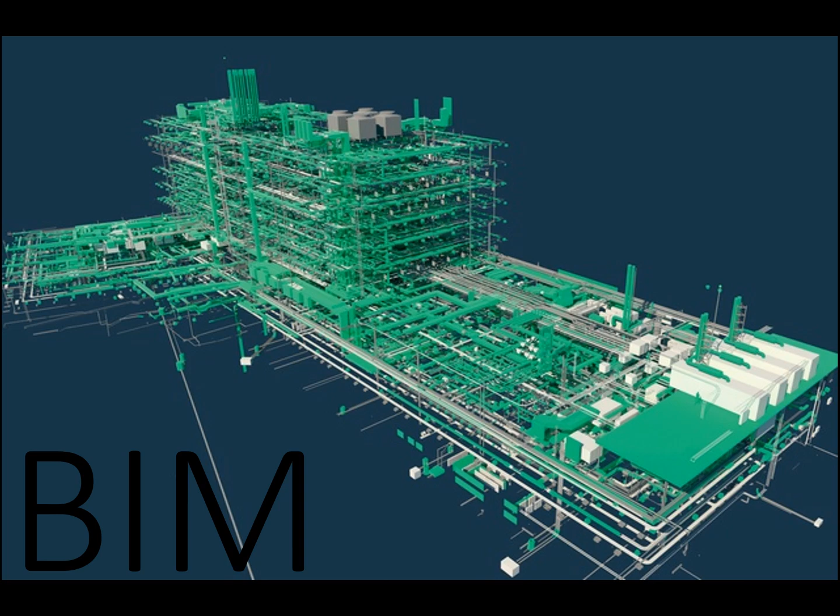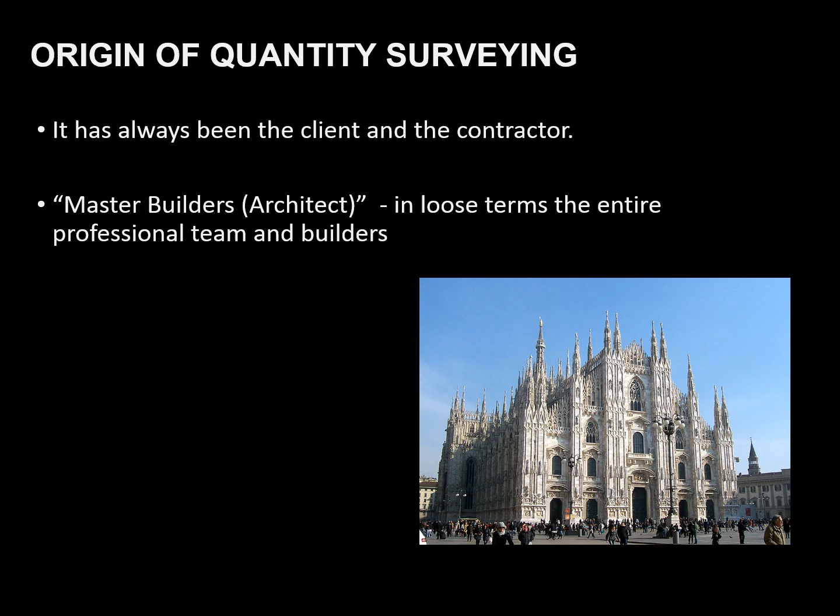The main thing is some background we need to look at, which you'll remember from first year, where we started with the origins of the quantity surveyor and how it spread out of the master builder functions, with quantity surveying as a specialization of the architecture profession as it developed later on, where clients started to request quotes beforehand from contractors. Contractors started colluding, and clients caught on to that, and then started appointing independent QSs to manage that, to check whether the quotes supplied are actually in line with what is being presented.

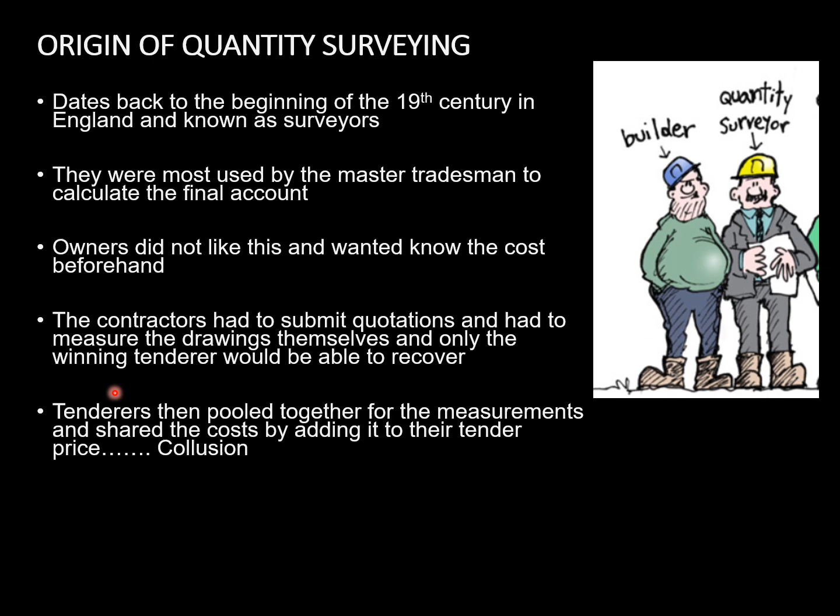That's the finalization of that background, but the main thing is we've always been working on BIM and building information modeling per se, and it's the maturity levels that differ, from where we used to work on paper-based architecture drawings, to getting digital drawings and 3D models to measure from, etc.

Architecture is mainly at the forefront of any design process, because they are the visionaries of whatever building is going to be constructed. Similarly, engineers are the visionaries of any civil construction that takes place.

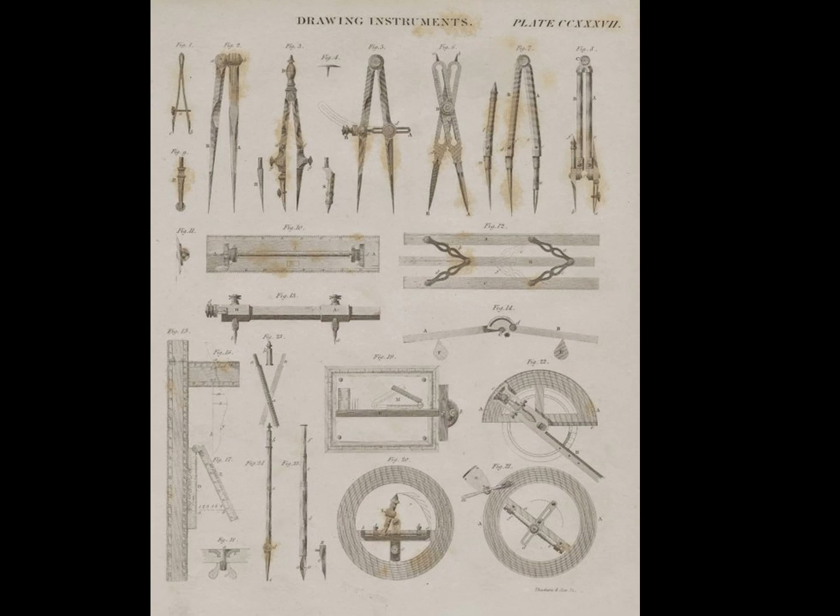They had quite a few tools that developed over the years, and this is typical of the details that would have been produced. But the problem was that making any changes had a big impact on the process, and any amendments caused a lot of problems down the value chain.

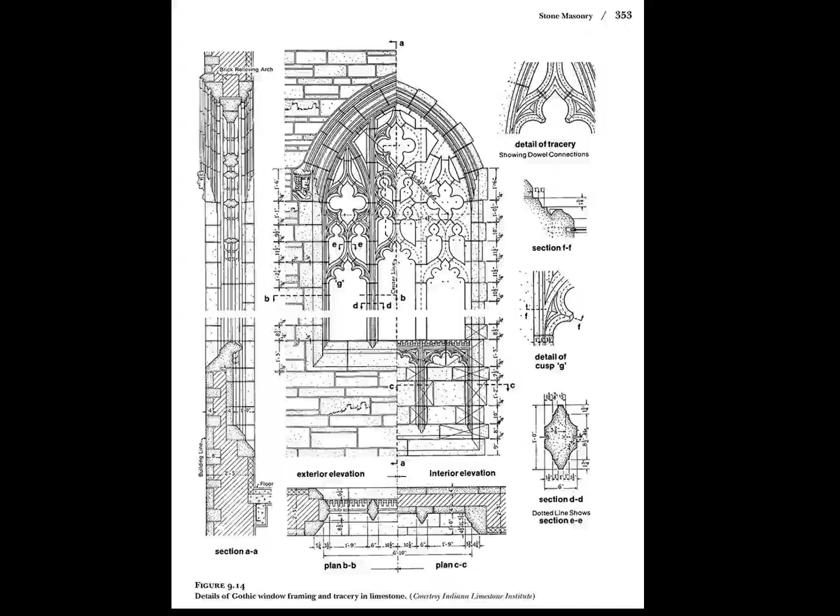The way models were presented was time-consuming hand construction, cardboard cutouts, etc. I mentioned to the residential class that architects still do the same design of model production through construction of physical models, for that hand-eye coordination, looking at the design and building it from scratch just to learn the process.

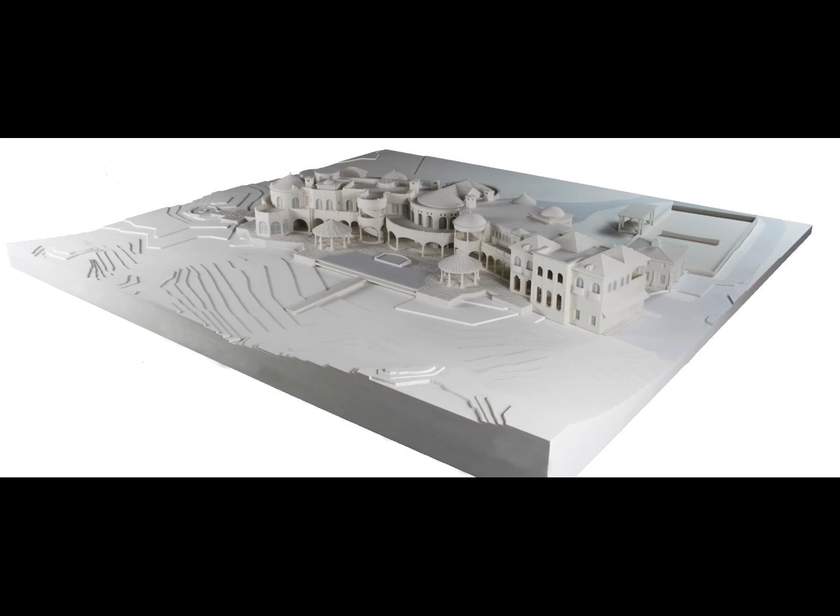Similarly, we do the same when we teach you how measurements work, because most of the programs we use are based on these principles, and we found that understanding these principles is much more important than actually knowing the software, because if you know the underlying principles, the software can easily be learned. But as programs get more user friendly, this process can shift slightly.

The short and the long of building information modeling is that information is produced by one stakeholder, then transferred to another stakeholder, and each time it's transferred, there's some information loss that takes place. So the main thing BIM wants to eliminate is the loss of information, to lessen that process as much as possible, and it also depends on the involvement of each stakeholder in between.

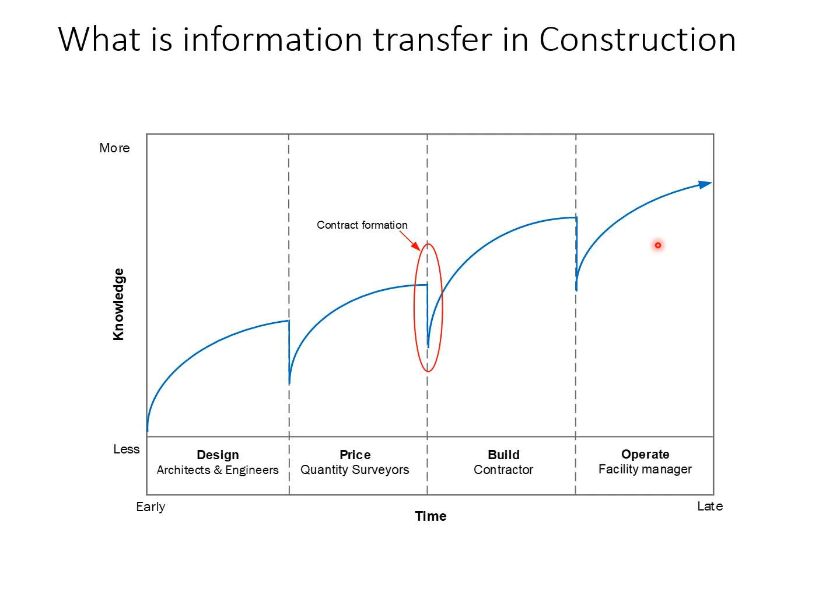Usually we find that most of the information lost is during and after construction, when handing it over to the client or the facilities manager, where a lot of information is lost.

Now, manufacturing is a different process because it's the same product produced over and over again. It's not like construction, where we have a new product produced each time, which places a little more emphasis on the transfer of information. Also, in construction, it's every time a new team put together to transfer information and do the necessary designs.

So for this section of the study material, the main thing I want you to understand is that we've got different maturity levels, where a BIM maturity level of 0 is still mainly CAD based or hand drawing type of technologies. We still use quite a lot of CAD drawings usually supplied by architects to QSs or construction managers, etc.

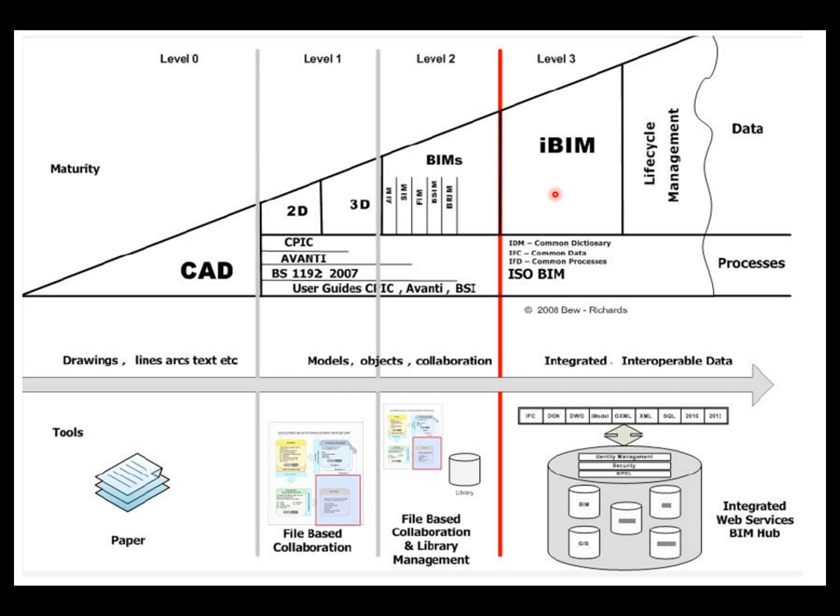Then this is just another visualization which also assists. We have BIM level 0, mostly paper-based drawings, CAD drawings, then going over to a 3D visualization, and then finally going up into an iBIM type of BIM environment where everyone does their part on the model. And then secondly is the integrated feedback between the physical and the digital.

Okay, then the other thing that I want you to be able to understand is, yes, we've looked at the BIM maturity levels, but it differs from the BIM project lifecycle, where you would have a typical program or design on a BIM model and have the conceptual drawings done, then the detailed design is still done on a 3D model visualization platform. The analysis, everything takes place on that platform. The documentation is pulled from this model, and then manufacturing takes place after that, and then 4D BIM and 5D BIM, on which I'll expand a little later on, is based on where the actual construction takes place.

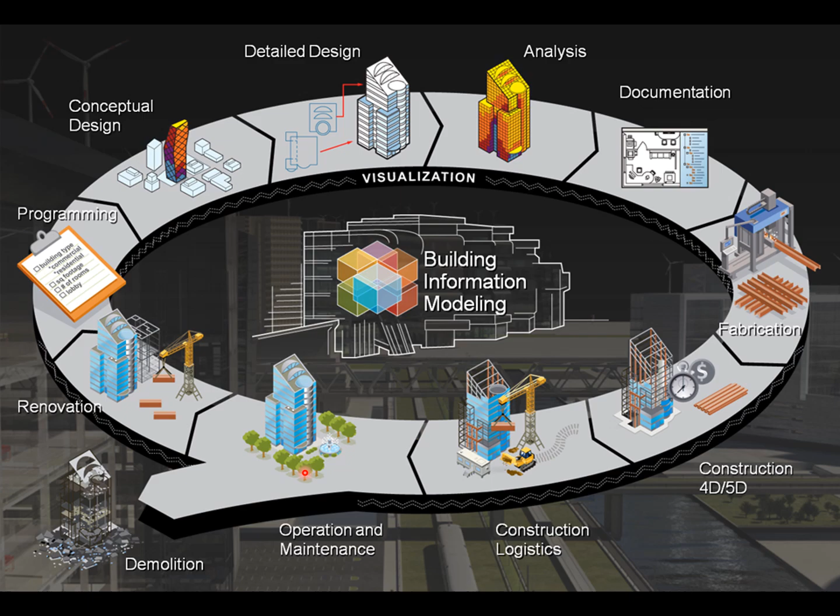The construction logistics is then also planned using the BIM model, and then the operational management and maintenance is conducted on the BIM model together with the physical structure that has been built. Something which is left out here is 6D BIM. Okay, and then any renovations will take place, or the design can be used for that, or for the demolition of the asset.

So the other thing that you need to be able to convey to me is that you understand that 3D BIM is mostly concerned with the architects or the engineers, the actual design of the model. 4D BIM is where you've got the construction managers or construction project managers that do the programming based on the model. And then 5D BIM is quantification from the BIM model. And then 6D BIM is the life cycle planning, which is the facilities managers, etc.

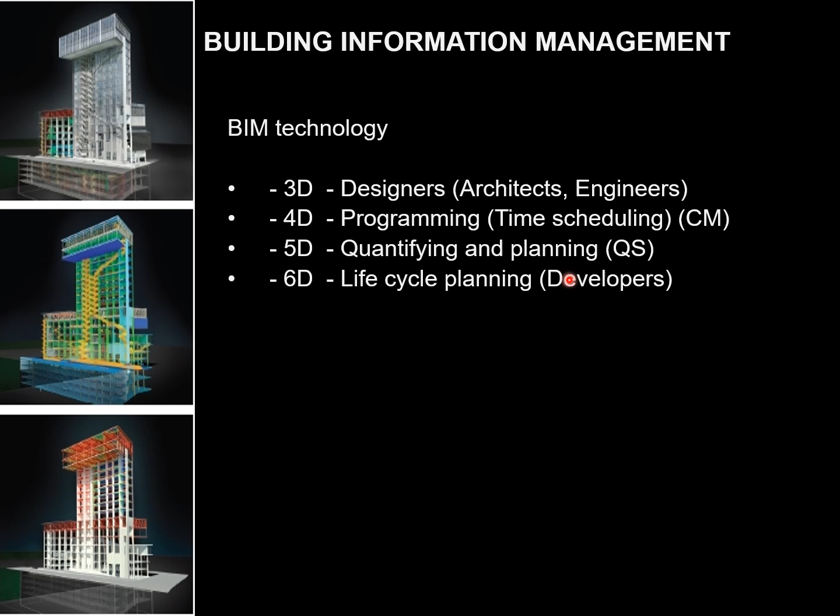Then I've just added a couple of videos. We watched the first one in class, and it relates to technology and how it has progressed, items that we haven't really realized but have revolutionized the way we conduct our business. For instance, PDFs revolutionized our way of thinking on how we transfer information to and from site on drawings, etc. Even just stitching a tender document of 600 pages together into one PDF was a major step forward for the construction industry.

Okay, and then I just included two other videos here, the one relating to 4D BIM and 5D BIM as well, which just gives you a bit of background on the differentiation between those two. And then I included the hype graph for the technology.

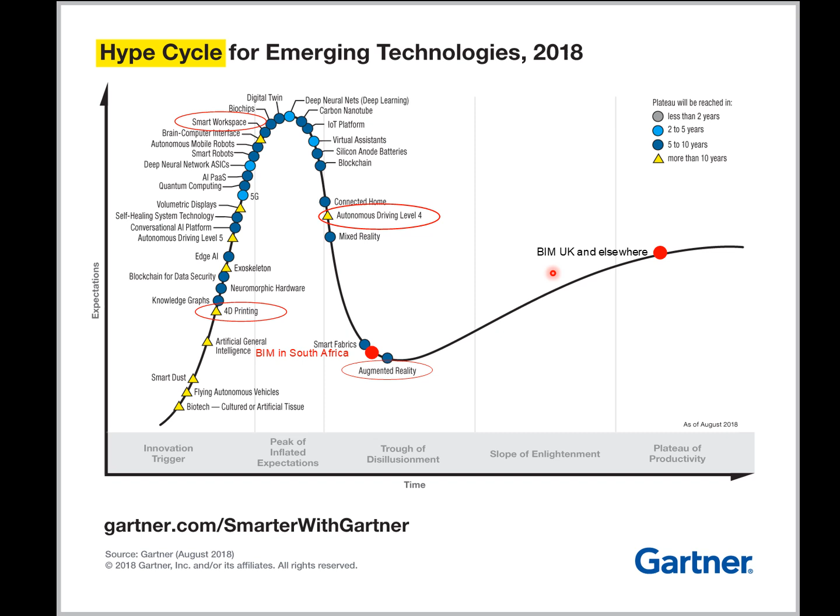So with any new technology that's being developed, there's usually a big hype. As we could see with BIM, everyone thought it's going to revolutionize everything that we do, but we realized that there's a bit more work; the architects have to assist us with more information on the actual BIM model to help us actually utilize the programs that we use on the model, like Dimex or CostX, for instance. But once we've gone through that, there is a place where we reach a bit more productivity.

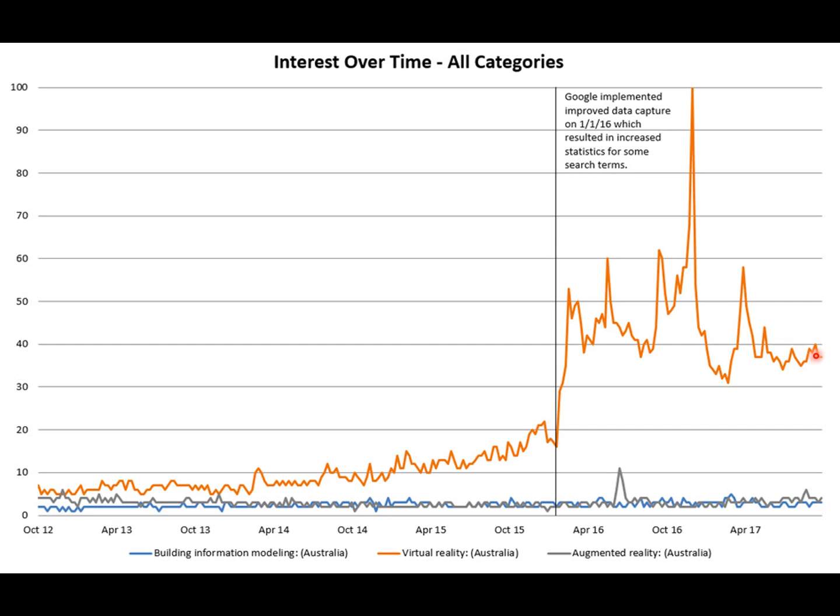Then what I just included here is construction 4.0 type of technologies and how it actually influences and the big influence that BIM will have on these technologies. So this is from Sawhney, a book that was published in 2020 on construction 4.0 or the fourth industrial revolution type of technologies for the construction industry.

But you can see in short how the progress is seen to go into the future, where we will have existing assets that will influence how we do design. The design will be a digital interpretation and enhancement of the environment, and then taking it back to the physical. And then from that, this physical, it will go back into the digital, and the process will run over and over again.

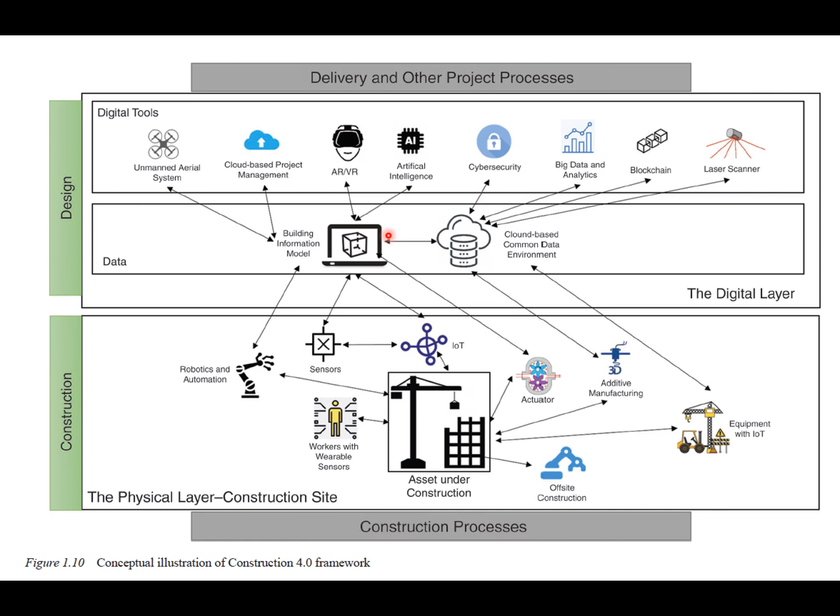Then I also just included a picture of how BIM serves as a catalyst or a middle man, if you want to call it that, between construction 4.0 type of technologies on the one side, which we have digital design, which influences the BIM model, which is then taken over to the physical construction area. And this is quite an insightful diagram showing how pivotal building information modeling can become in the future.

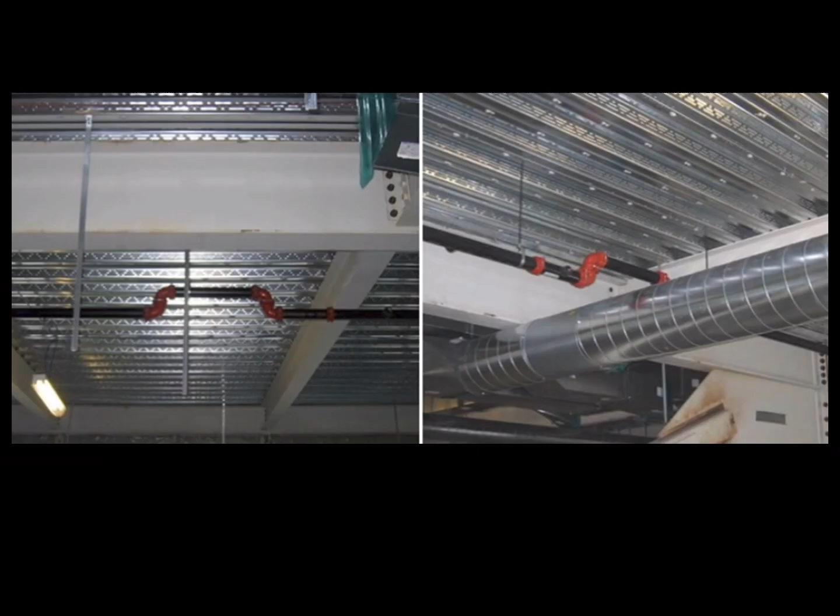So the big advantages of course, during the design process is clash detection and finding challenges between the different trades beforehand, the quantification thereof, etc. You can just see some practical examples of clash detection that assisted where the plumbing installation was done, allowing for the air conditioning to actually run underneath the existing design.

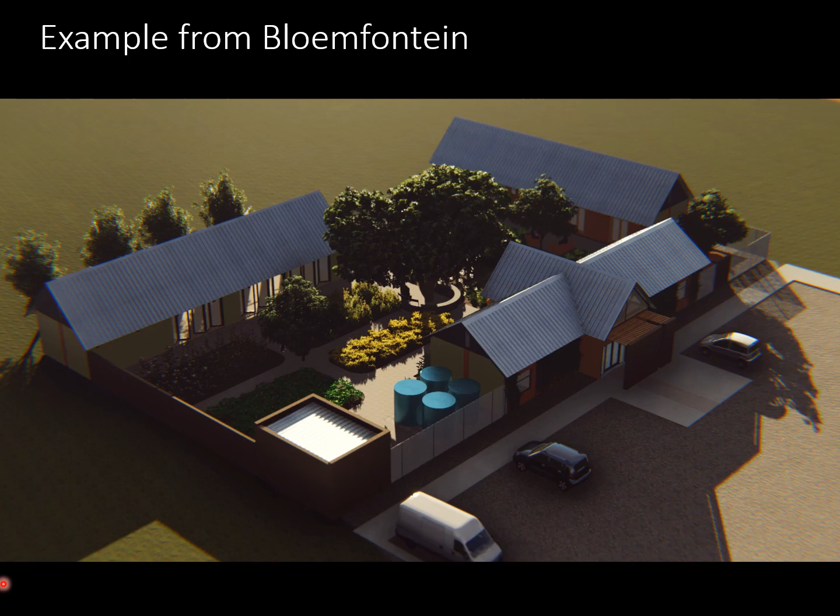Then this is just a project that we worked on now recently here in Bloemfontein. This was just a visualization. I don't know if this will actually play. Let's see if it can play. Oh no, it didn't want to play. So it was just a representation, but it's a typical example of what we're currently getting. We're getting a lot of nice 3D designs from architects, but it doesn't have real information behind it. So the previous picture was actually a nice panning shot of the entire project, just looking at how it will look on site.

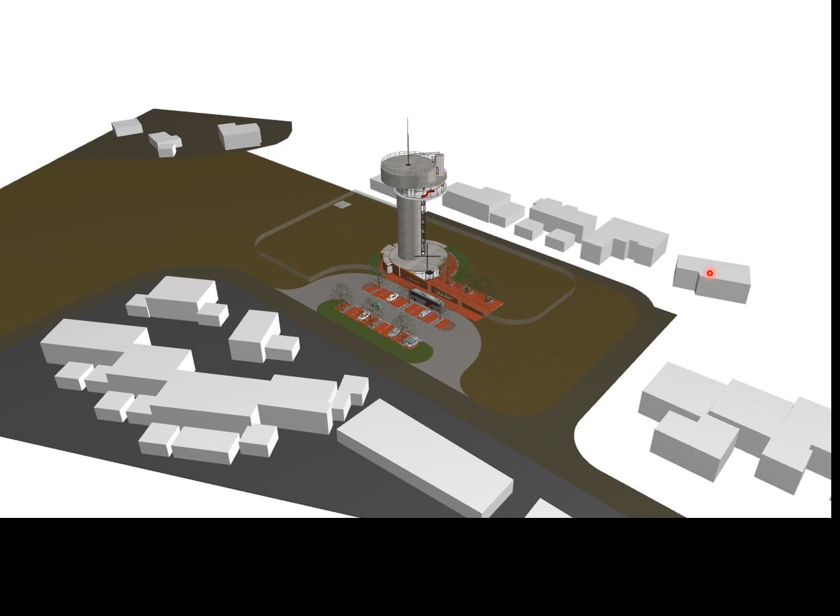And then I also just wanted to show you this representation. This is quite old. I think it's 8 or 9 years old. It is a project that we had here in Heuwelsig, a planned pressure tower, and the visualization actually assisted us quite a bit in just seeing how the shadows will actually be cast over the adjacent or surrounding buildings on top of the hill. But still, it showed us a lot of detail on the design, and it gave a lot of perspective on what we had to measure.

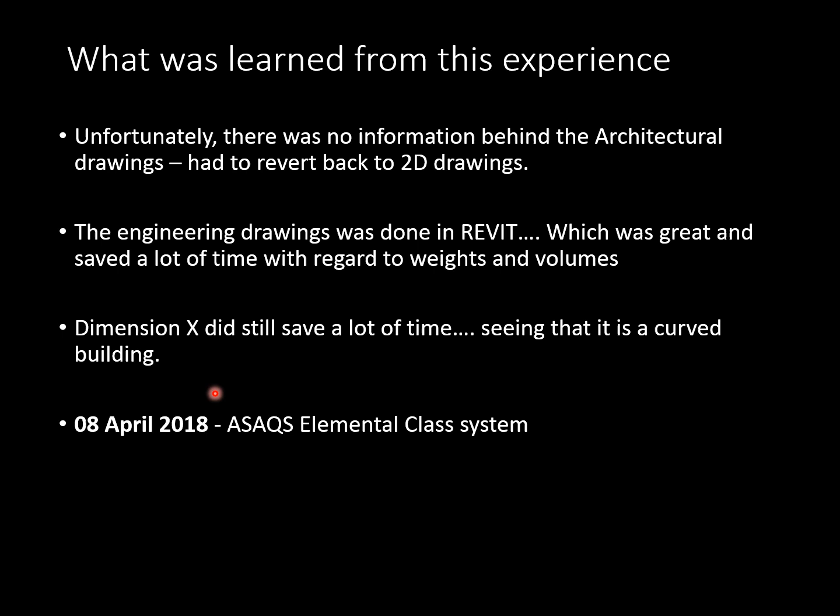And we were quite excited about it, and we actually got CostX or the Dimex version for South Africa for the 3D design, 3D quantity tables. But when we actually got the information, it was still just objects that still had to be converted back to 2D drawings to actually do the actual measurement. So this is just basically the mention of that.

So yeah, in a nutshell, the main thing on 3D BIM that I want you to understand is, firstly, it is not a technology, it's a combination of technologies, and different people working on different sides. We've got different motivation. We don't have government stepping in and making policy to have certain standards at a certain time, which is one of the big barriers for South Africa.

Secondly, I want you to be able to distinguish between the BIM maturity levels, the project life cycle, and the different role players on BIM. So I want you to be able to recognize that 3D BIM is mostly for the design, 4D BIM for the programmers, 5D BIM is for the quantity surveyors, and 6D BIM is for the facilities managers. So I want you to specifically be able to convey the difference between those two factors.